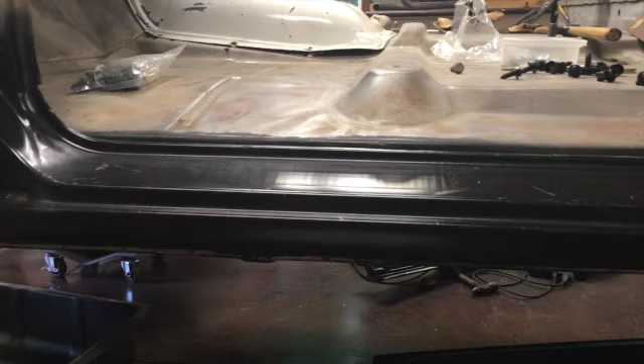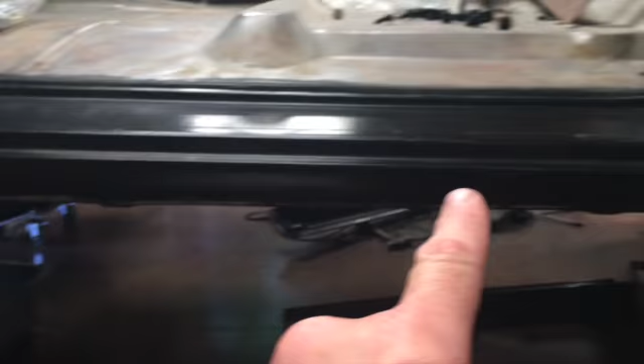Welcome back. Last video we installed the inner rocker box panel, and I've already installed the outer rocker box here. I didn't quite leave you out because I still got the right side to do over there, but I've been busy with all kinds of stuff.

We're right in the middle of the old COVID coma here. And when the boy comes home, we try to get out here, steal a little time out here in the shop and get to work. But he's back in school now, so it'll just be me out here in the shop, and I could do a little bit more taping and videoing and get you guys back in the loop.

Spent a good bit of time trying to get these aftermarket rocker box panels to fit, and I'll take you over on the other side and show you what was involved with the right side.

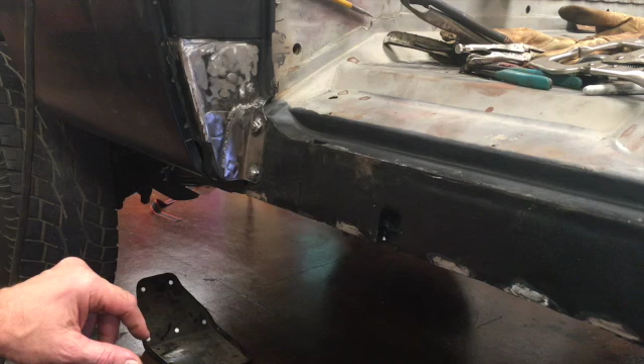All right, we're over on the right hand side of the truck looking at the rocker panel, and I can tell you these rocker panels have been extremely difficult to fit. Part of the problem was initially I had ordered new rocker panels from, well, I don't know where I ordered them from. That's not helping you guys out much, is it? But they didn't fit. If you can see, all this scuff mark going on right here is the door, front end of the door dragging on this area.

So I scratched my head for a long time and wound up ordering another set. I was getting ready to do some major surgery on these, cut them apart and bend them the way I needed them to fit, then weld them back together, and I was dreading that. They're not super expensive, about 29 bucks a piece, but I noticed the left side fit better than the right side, and somehow I had ordered two different brands.

So the left side was an AMD, which I think is a Tri-Plus part, and it obviously comes out of a different mold, different die. If you see this lip right here, let me see if I can get it in frame better. It's about a 90 degree, not quite a 90 degree here.

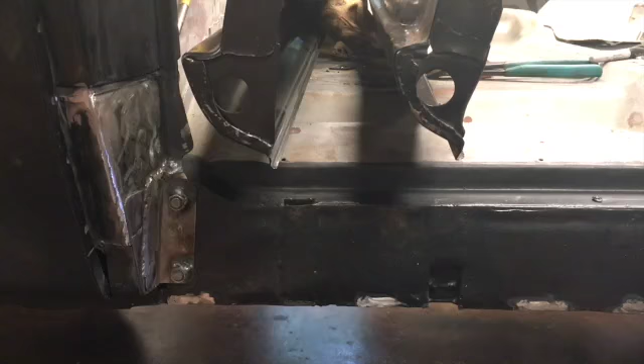So the door gap, if the door gap's right and the door pivots open, it's not dragging. Hopefully it's not going to drag on this edge right here. If I pull the other one up - all right, just about impossible for me to set those up so you can see those angles.

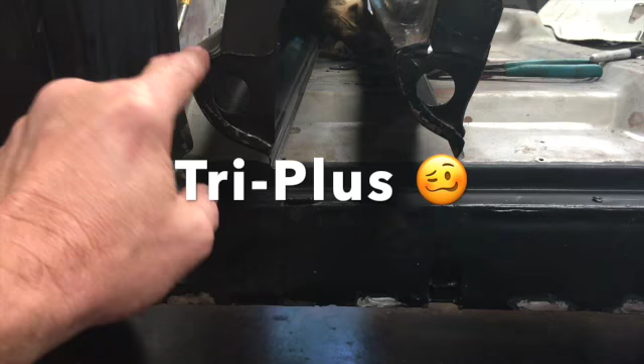But this is the Tri-Plus one from AMD, and you can see that this angle here, with the proper door gap, when the door swings open, it's gonna hopefully stay clear of this radius in here. This one did not. When you set proper door gap and then swing it around, the corner of the door would just dig into the radius.

So I adjusted and tweaked, and I don't know how many days or hours I spent trying to get that worked out and just could not. Then somehow figured, hey, I'm going to order another one of these and see what happens. And this one seems to be fitting a lot better.

Now, there were still some issues in the back of the truck here with these new quarter panels, the bedsides, and let me get set up and I'll show you those.

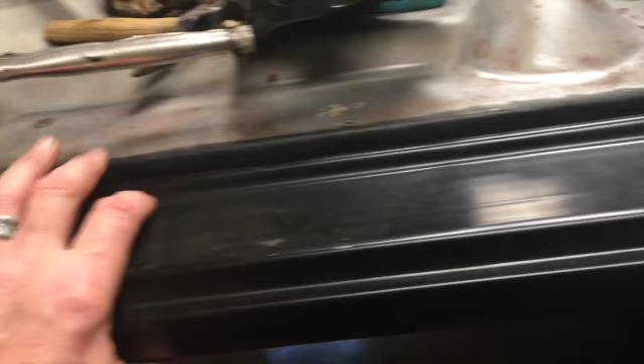Along this edge up top, I didn't put any welds in it. I've got the assembly manual for this truck now. Let me grab it, we'll take a look at it.

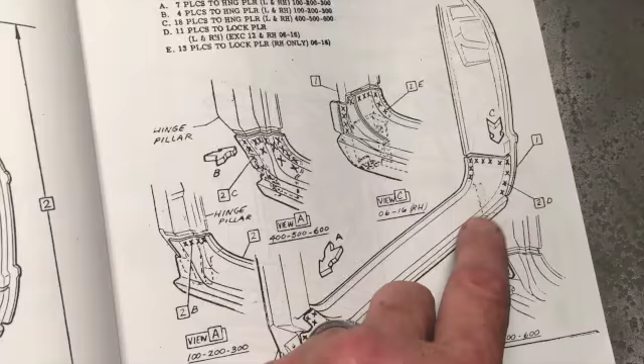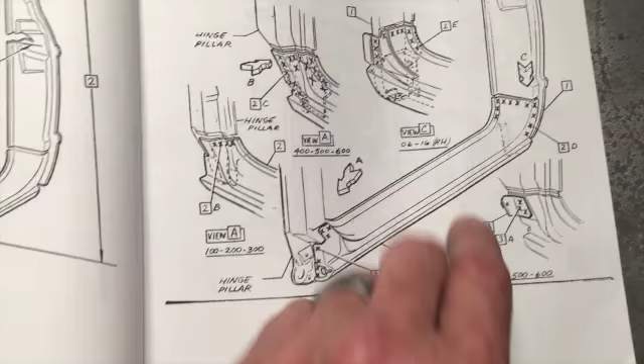The assembly manual does a pretty good job of telling you where they put all their spot welds when they were putting the truck together originally. On the left-hand side of the truck, I pretty much followed along with what they did. Obviously they used a big machine to spot weld these together, and we're drilling holes and plug welding, but I tried to mimic what they did as close as possible, and it worked out well. You can see they didn't add any welds along this lip right here, and I didn't either.

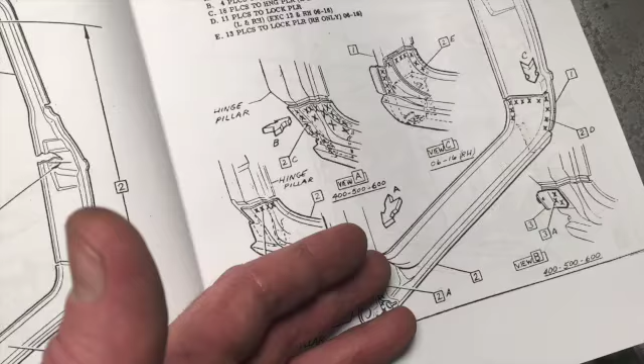I did put a nice bead of seam sealer there, then slid the rocker panel on, and I treated the back side of the rocker panel very well—a couple coats of paint and some undercoating in there. So I'll do the same: seam sealer, plug welds front and back, and then spot weld along the bottom, and that should be good.

Here's this book—it's been very helpful. Factory assembly instruction manual, got it off the internet. I think it was about 45 bucks. I wish I'd bought it earlier, because it has some great information in here.

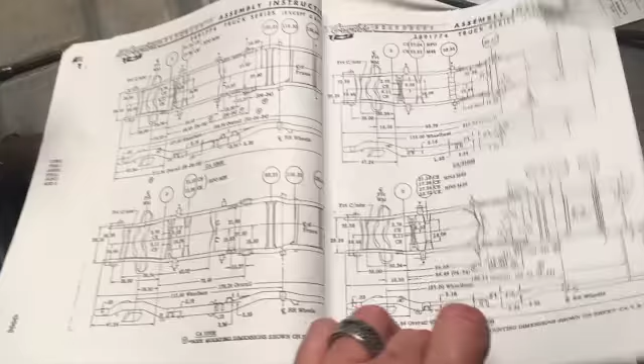When we were back straightening the frame, I wish I'd had all this information available back then. I had bits and pieces of it—I recognized some of these charts from the internet that somebody else had posted. But man, this thing is a wealth of information for sure.

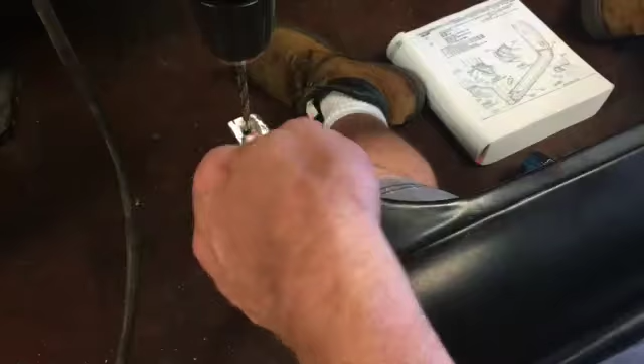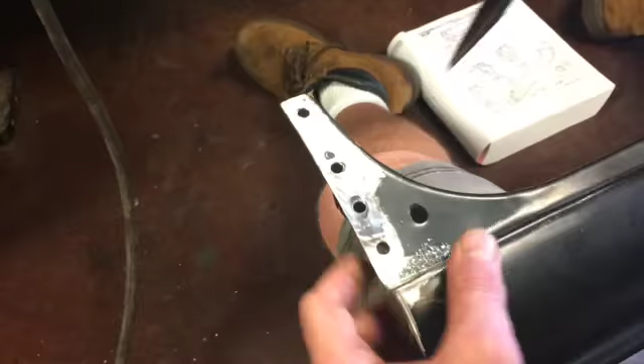All right, I got the holes drilled where I want them for the plug welds on both ends. Now I'm going to treat the inside of this rocker panel so it never rusts again, and nobody else will have to go through this again.

You can see that I ground off the paint. This has got POR-15 on it, this inner rocker panel, and on the other side, obviously we changed it. This side was in pretty good shape. I installed the scuppers like I did on the other side.

I did it a little bit different on this side just because I didn't know what I was doing—I was figuring it out on this side. But still very good drainage over here, so none of the dirt, grime, and water will be forming inside this channel between the floor pan and the door seal, and nothing inside of the rocker panel should build up. There's plenty of drainage.

Between, well, where these bare spots are, I'm going to use the pinch welder or the spot welder to weld those together. And I've peeled off the paint on the inside of this inner rocker, and I'll tape it up before adding a couple of coats of paint to the inside and some undercoating.

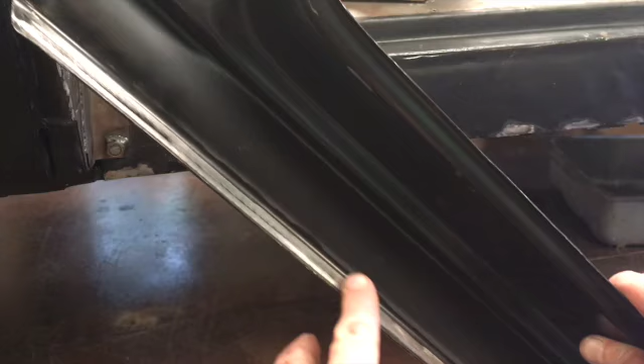Once that gets all done, we'll come in the front of this rocker panel through this hole right here, this 1-inch hole. I've got a deal set up with a long nozzle to just flood this bottom with undercoating, let it soak into this joint right here, and hopefully flush it all out nice and smooth, so no more water will get trapped in this seam. That's my hope—it seemed to work pretty good on the left side.

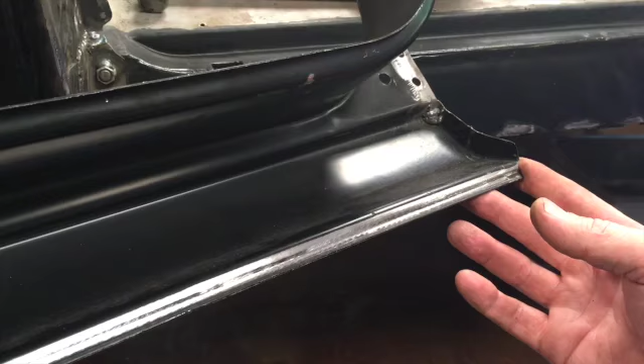All right, getting ready to put this rocker box on. The process we took this inner rocker box plate through was wire wheeled, sanded, and POR'd. There's a coat of metal etching primer on it, and then some bed liner—a Rust-Oleum product—and then on top of that is undercoating.

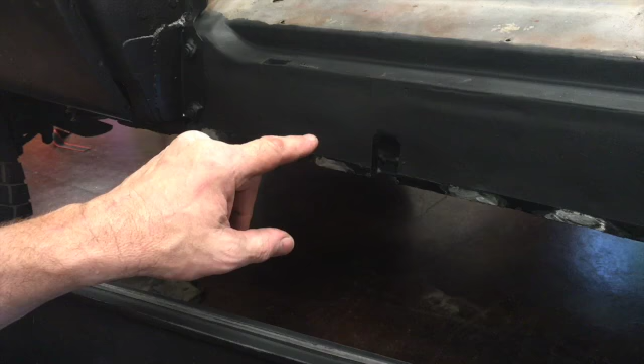And same up here, I treated this with the metal etching primer and then the bed liner and undercoating. And the same in here. This has got that EDP, the electro deposited primer from the manufacturer, TriPlus. And then cleaned up, scuffed up, bed liner, and then a couple of coats of undercoating as well. So this looks good.

Hopefully it'll stay on and last a long time. I've used this undercoating stuff, it never really seems to get really hard, and it works pretty good around these areas where we're going to weld. I've had the opportunity to weld it and then take it back apart and find out that it kind of melts around where you're welding, but it doesn't all just go away. So I think it's gonna leave it fairly well protected around those welds.

So back on you go, and we'll clamp it on down and get to the process of cleaning out these holes. I take my burr. You can't see any of that, can you? Let's get you up there. I'll take my burr on my die grinder and clean out these holes so we can get some penetration in there with the welder.

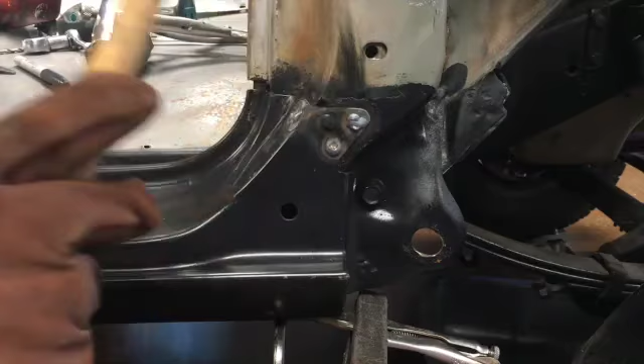All right, the spot welds are all done, and as you can see, this thing fits pretty good. Actually, really good. You saw me as we spot weld in here, kind of tap around as the metal is nice and warm, and snug it up nice and tight to the A-pillar here.

You can see the weld where I changed the lower part of this A-pillar. It was all rotted out at the bottom, and I didn't do a great job of grinding this weld completely off. I just didn't really see the necessity of doing that, and we actually may smooth it up here a little bit more, because the next step is for me to just spot weld along this edge.

To kind of blend this piece of metal, the rocker box, into the pillar, and I'll do it all the way around the corner, and we're probably going to have to create a little bit of a filler piece to bridge this gap here. Be a little bit tricky probably in this corner.

This rocker box has been changed once before, and I know they brazed it in, because you can see remnants of the brazing right here, and it looks like they used the pointy end of a body hammer to really whack away right in there and created a little bit of a divot there. We can fill that up with weld and smooth it out, blend it out. But that remnants of brazing rod might give us a little bit of a hard time as we weld that.

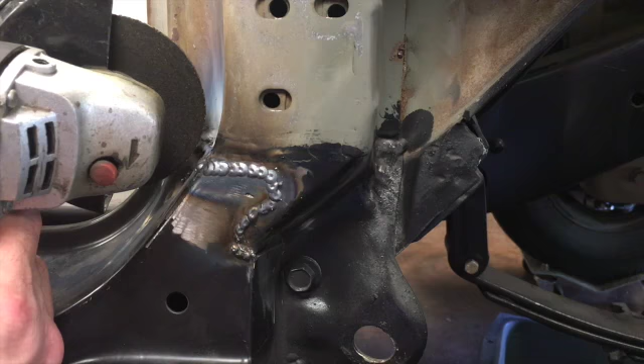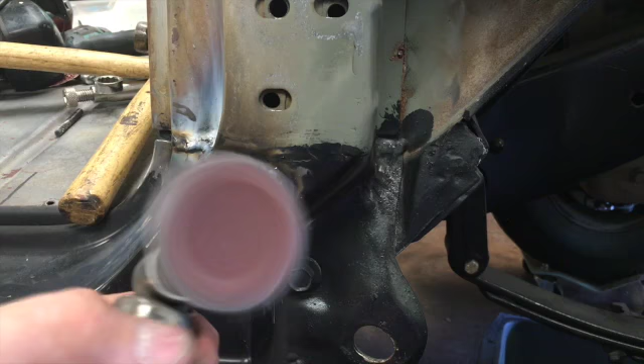And clean it up, go back over it if there's any more voids in it. But hey, a little tip here, I like to take my cutoff wheel, which is pretty easy to control, and just knock the tops of these welds off, and it does a pretty good job of getting in here and getting it close. Once I get it close to being flush, then I come back over with a flapper wheel and smooth it, blend it, and then kind of finish it off with my 90-degree die grinder here and several different grits of sandpaper. Usually start off with something like a 40 grit and wind up down to I don't know what this is. It's probably still fairly coarse.

Well, it doesn't say, but anyway, that does a pretty good job, and then we can come back with a palm sander, a DA, and get it really smooth.

All right, with it cleaned up a little bit, you can still see there's some low spots in here. Right in here, we'll put a few more spot welds in, fill this void, and then this lull right in here we'll put a few spots in, keep blending this up, as well as this corner, and all along in here the same deal.

You can still see some brazing in here. It's going to protest as we weld right in here, but we'll get through it. And then I cut a little piece here, a little filler piece, and it looks a little rough on the edge, but I'll tack it, and then I'll be able to manipulate this edge a little better.

Just some spot welds along the bottom and top edge, and it'll blend out nicely. All right, there's after blending of round 2, and you can see we're making progress here. Probably do a little bit down in here, another tap or two, and one there as well, and then maybe a few across the bottom here, and a couple along the top edge of that weld, and build up this corner a little bit more, this outer corner.

And then we still have quite a bit to do inside of this radius here. This did protest a whole lot when I hit that bronze. I think most of it's gone now. We've burned most of it out, but we'll put a few more along the bottom here, a few more on the top, same along here.

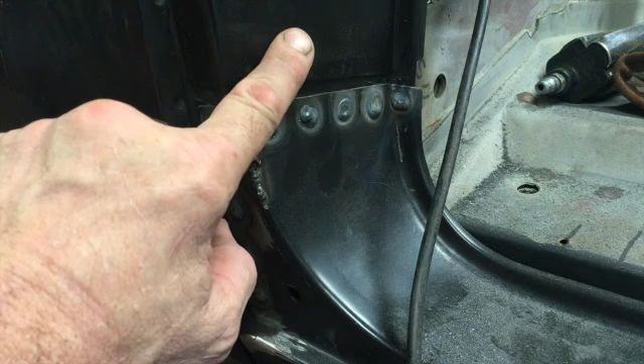So I've got the same to do on the back side. It's going to take a filler piece in here as well. I'm not sure exactly how to handle this, but this face is quite a bit higher than this face. This joggle they stamped in the sheet metal is thicker, or more of a joggle, than it needs to be. I probably won't manipulate it too much—just grind these welds down, smooth them up, put a filler piece in here, smooth it all out the best I can, and then plan on putting a nice skim coat of mud in there to fair it out.

All right, we got that all filled and faired—not perfect, but a quick thin coat of filler will make it nice. It created a little bit of a bump here just because of the difference in the height of the skin, but a little bit of fairing compound, a little Bondo, I think is going to square that away and look pretty decent.

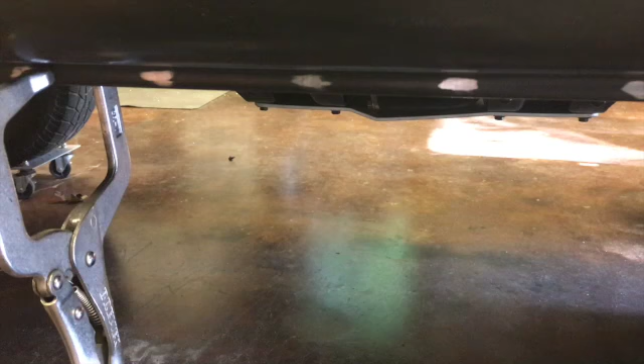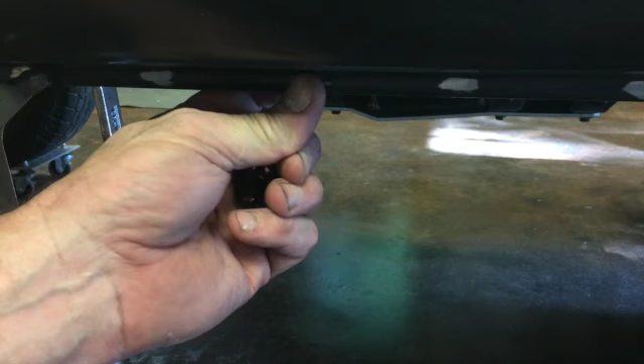So now we're going to turn our attention to the lower pinch weld here. We've got, looks like, 1, 2, 3, 4, 5, 6, 7, 8, 9—about 10 spots that need to be spot welded together. I used my Harbor Freight spot welder on the other side, and it seemed to work pretty well.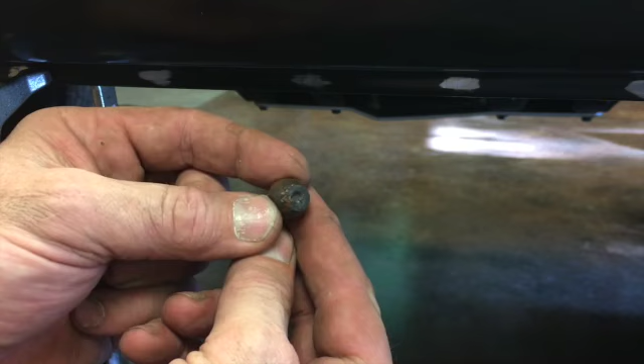Now, when I dragged it off the welding bench, I noticed the tips for it were looking pretty rough. They're copper, and they were getting pretty big in diameter, kind of mushroomed, even a little pitted in the center. So I chucked them up on the lathe and was going to just put an edge on them, and boy, that did not work. I was trying to ease into it, and it just ripped it right out of the chuck, not once but twice.

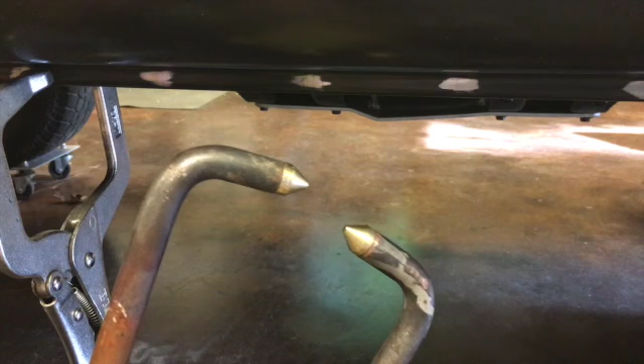So you can buy these things, and I think I will buy some more tips, but I had some brass stock, so I just chucked that up in the lathe and made a couple of brass ones. We're going to give this a whirl, see if it works. It's certainly a lot harder than the copper. We'll see if it makes a good pinch weld or not.

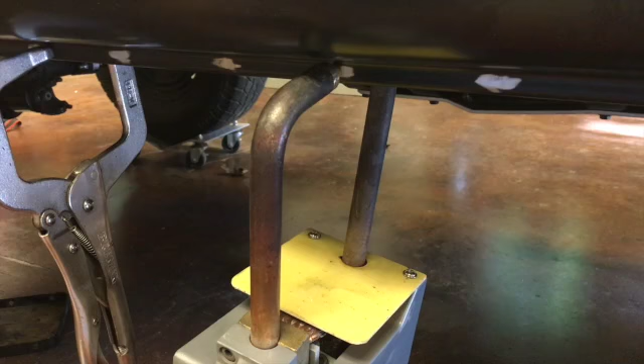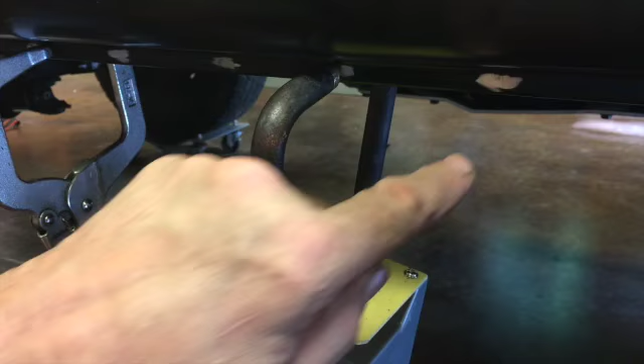All right, right here where we have the spot welder clamped on, there's only two thicknesses of metal we're spot welding together: the outer rocker box and the inner rocker box panel. They cut notches in—it's actually the rocker box itself—before they attach the inner rocker box panel on. So you're not trying to spot weld three pieces together. Everything's bare metal here, and it fits nice and tight.

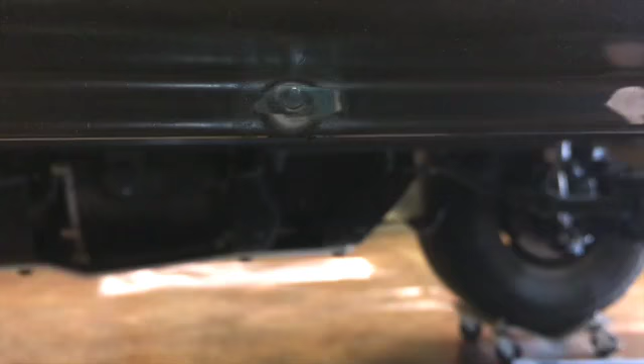So let's give it a whirl here. All right, that seemed to do good. Let's see what it looks like. Let me get you wheeled in there. All right, what do you think? Just like factory, huh? All right, well, we're going to do—what did I say—there was 10 of those, 9 more, I guess.

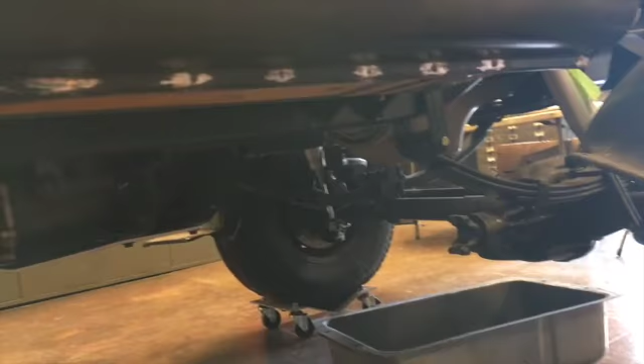All right guys, it's done—all spot welded. I don't know that these tips did any better. About 7 or 8 welds into it, they started to spark and carry on. I let it cool down for a while, bumped a grinder to them to true them up a little, and then finished up with them. But those copper ones last a good bit longer before they start to fail. So harder is not better.

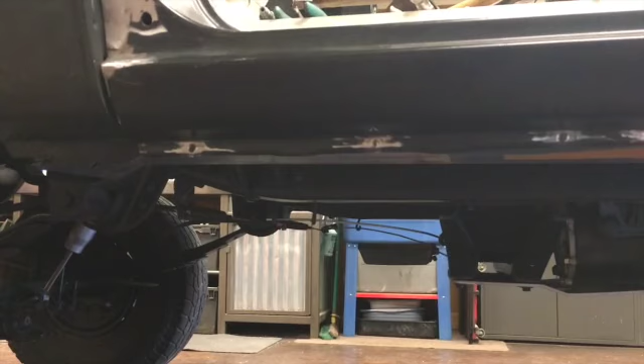But hey, I'm glad to have this part of the project done. These rocker panels are a significant job—they're not easy. So you can do it, everybody can do it, just take your time and work your way through. But I'm glad they're done for me. Thanks for watching.